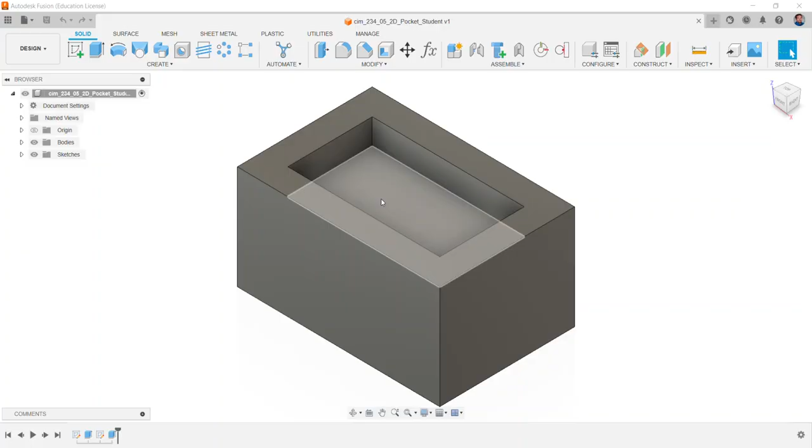This video will show you how to perform a 2D pocket milling operation in Autodesk Fusion. In order to get started, we are going to show one change in order to create a color appearance change to a face. Select the face at the bottom of this pocket. Right click and select Appearance from the menu.

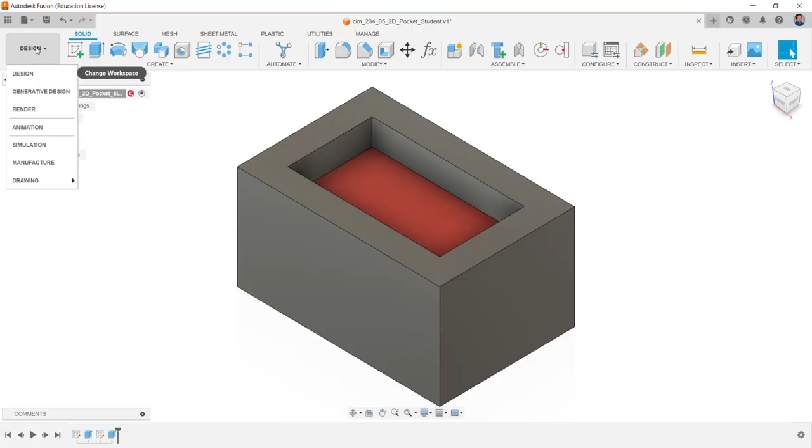From the options, scroll down, find the paint folder, expand the glossy folder, and find a red color to drag and drop onto the face. Select Close. Let's change from the design workspace to the manufacture workspace. Here we're going to define our setup.

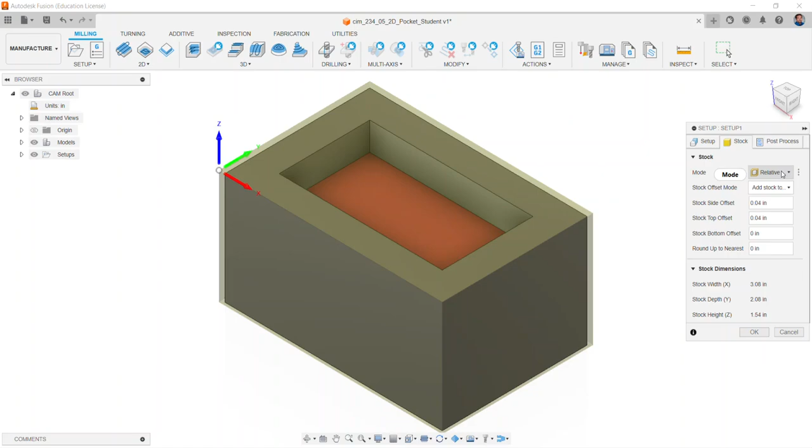Select Setup. In this scenario, we're going to select the box point, the bottom left corner, verifying our Z, Y, and X directions. Select the Stock tab. Relative size box will be used. Under the stock offset mode, select no additional stock. Notice the stock dimensions updating in this menu.

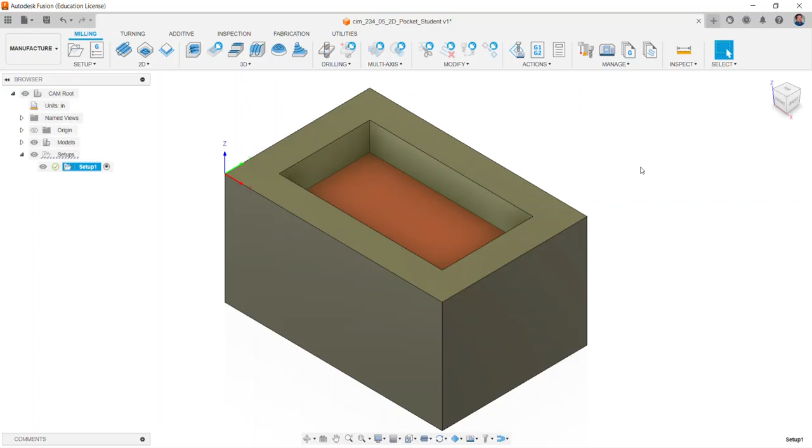In post-process, select the name and name it with the last name with 2D pocket. Select OK. Now from the 2D panel, select 2D pocket. Select the tool. We will use a large diameter end mill, such as the 1/2 inch diameter end mill, in order to remove a lot of material efficiently.

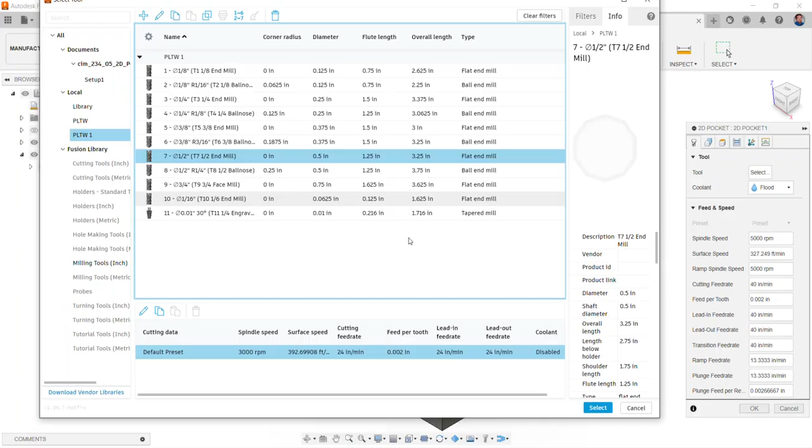The rest of the values on the tool tab will be left at their default. Select the Geometry tab. For pocket selections, select the red face or the bottom of the pocket in order to generate, or even the edge of the pocket will also be able to be selected. The rest of the items will be left unchecked, such as stock contours, rest machining, and tool orientation. Select the Heights tab.

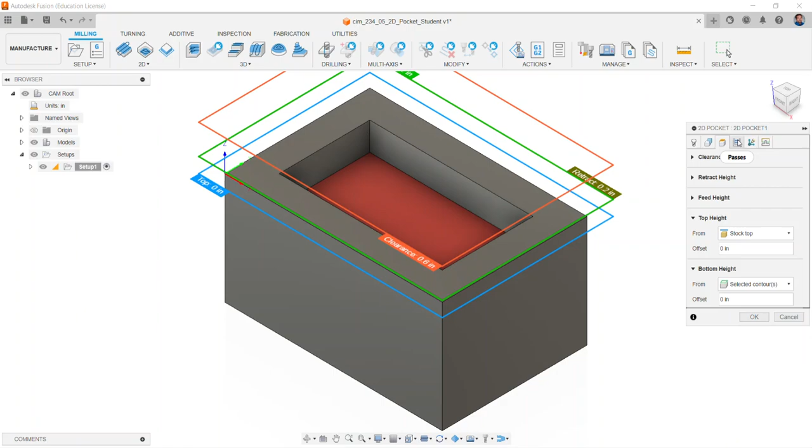We will leave clearance, retract height, and feed height at their default values, and we're going to verify the top height is set to stock top with a 0 offset, the bottom height set to the selected contours at an offset of 0. Move to the Passes tab. From here, most of the items will be left at their default. The maximum step over will be at 50% of the tool diameter, or 0.25.

And from here, check Multiple Depths. The maximum roughing step down is how much the tool is going to step down into the part. Make sure that we change this to 0.25. This is a calculation typically based upon the diameter, so since we're using a 1/2 inch end mill, this will be 0.25. And we will uncheck the stock to leave.

If there's a value other than 0 inches, you can always select the 3 dots, enter in 0 inches as a stock to leave, and say Save as user default. So radial stock to leave and axial stock to leave should show 0 inches. The rest of the tabs will be left at their default values. Let's select OK. It shows a path that is being created and laid out by the pocketing operation.

Under Actions, select Simulate. Select the Start button to watch the tool perform the operation. Select the Statistics tab to see how long the machining time takes. Another way that we can utilize another operation is by right-clicking on the operation in the browser and selecting Suppress. If we wish to look at another operation, but yet don't want to delete what we've created, we can always

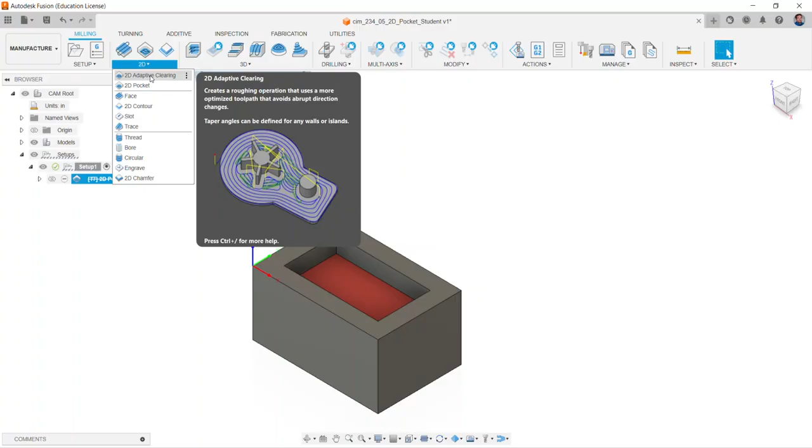suppress this operation. Under 2D, we will select the 2D adaptive clearing, which creates a roughing operation with a more optimized toolpath in order to keep from having any abrupt changes to the direction. So selecting adaptive clearing, the tool is already selected. Select the Geometry tab. Select the red face for the pocketing contour.

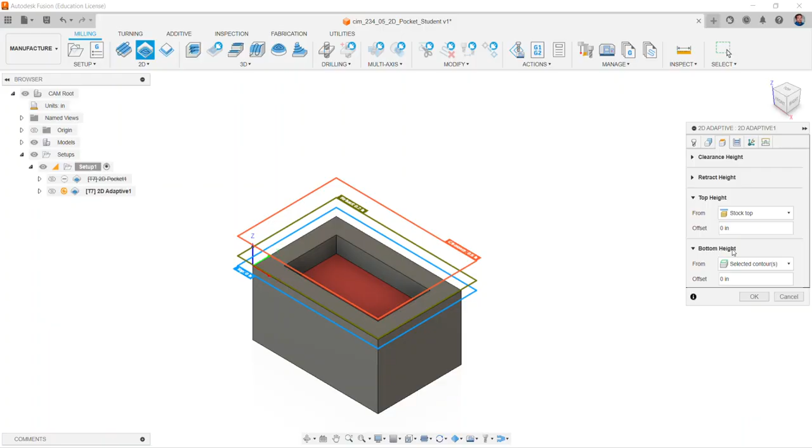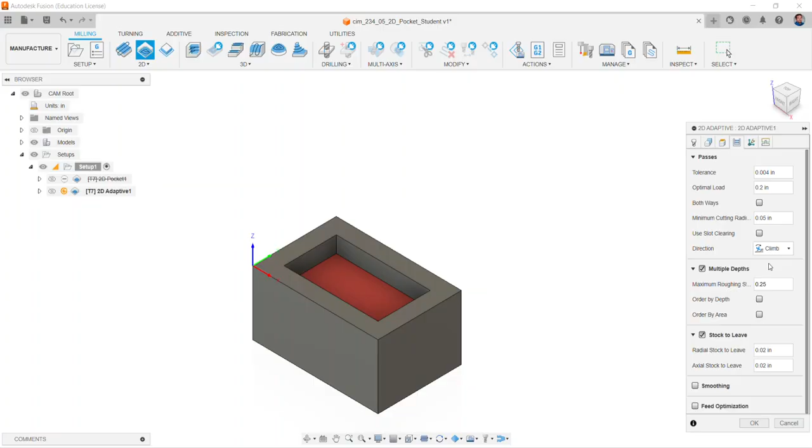Under the Heights tab, verify that the top height and bottom height are shown: stock top with 0 offset for the top height. Bottom height is selected contour with 0 inches. Select the Passes tab. Make sure to check multiple depths and change the maximum roughing step down to 0.25. Uncheck Stock to Leave and select OK.

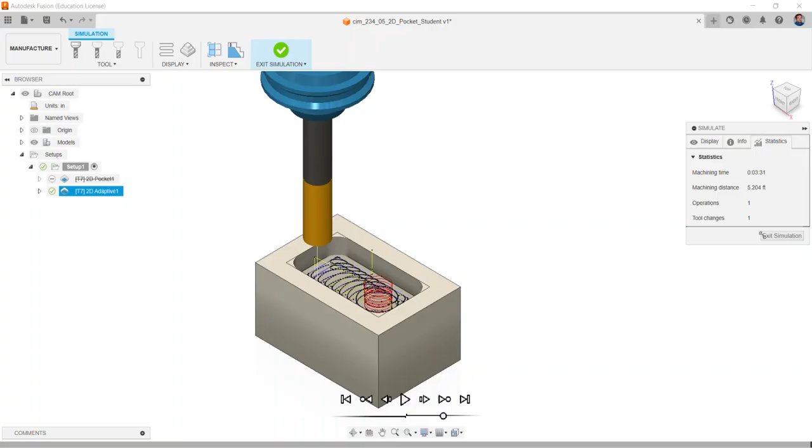Notice the tool operation has a very similar helical kind of advance into the part, but yet has a different toolpath than the pocketing operation. Under Actions, select Simulate. View the simulation and verify the statistics. Notice the difference in the machining time. Exit the simulation. We are always able to suppress this operation. If we wish to see the pocketing operation once more, right-click and select the Suppress option.

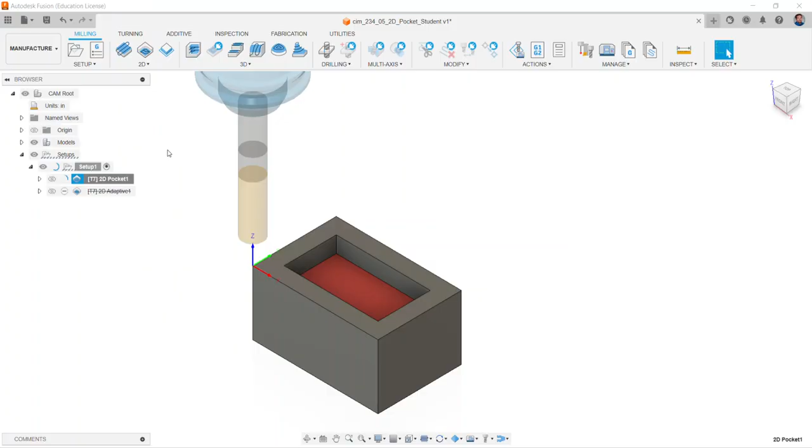If you see the toolpath is out of date, right-click on the toolpath and select Generate. The checkmarks indicate that this toolpath is ready to be simulated once more and can be used in order to create our NC code. Press play to simulate, verify in statistics to see the machining time. Select Exit Simulation. Make sure to save your file.